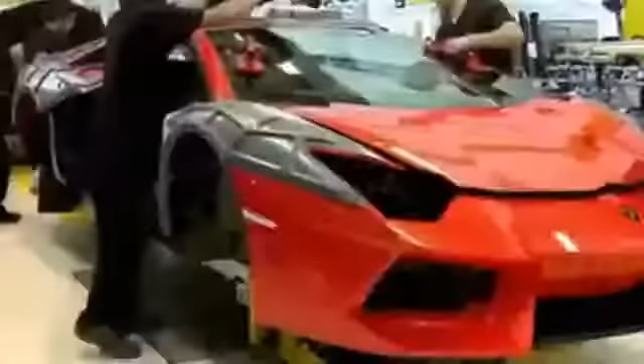But this will be no simple reworking of Lamborghini's old flagship models. Its engineers and designers are given the task of starting with a completely clean slate. At its MegaFactory in northern Italy, the Lamborghini team has been stretched to its limits to fulfill those expectations. Now, as its latest creation takes to the road, it will be seen if the high-risk strategy has paid off.

Lamborghini has been responsible for some of the world's most iconic sports cars of the past half-century: the 350 GT, Miura, Countach, Diablo. The brand has achieved global recognition for its no-holds-barred approach to automotive engineering. Its extreme and powerful machines have placed it among the supercar manufacturing elite for decades.

But there's no room for complacency in this increasingly crowded marketplace. And a decade since the launch of their last flagship model, the Murcielago, it's time for Lamborghini to flex its muscles once again.

It's up to Stefan Winkelmann, the company's CEO, to come up with a bold approach. One of the toughest things was to give the right briefing, and it took us weeks and months. And once I went home and I was thinking about it, so easy - it's just down to two words: no competitors.

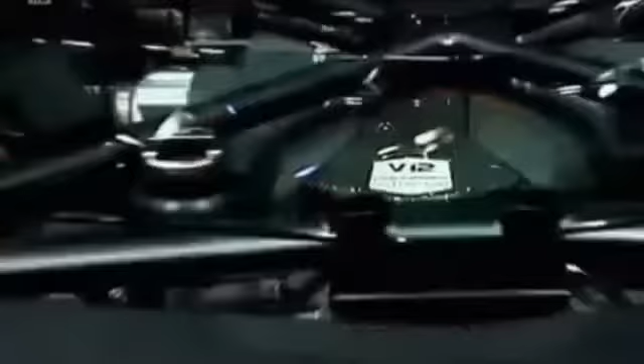For us, the Aventador was something which has to re-establish the leadership, to be a benchmark for a decade. So it has to be a jump of two generations, something really different from what has been there.

Powered by Lamborghini's trademark V12 engine, the Aventador can reach speeds of up to 350 kilometers per hour, and it travels from 0 to 100 in under 3 seconds. It's their fastest car yet.

But remarkably, speed isn't even top of Lamborghini's priorities for the Aventador. Stefan Winkelmann has laid out his vision in a manifesto for the future of the supercar. Now, in our days, it's much more important to speak about the power-to-weight ratio, so the balance between the power of the car and the weight of the car. And for us, in the future, it's much more important to reduce the weight, because you get a better feeling, a better driving experience. The Aventador is the first test of this new blueprint.

The National Geographic channel has been given unique access at the Lamborghini factory to witness the creation of some of the car's first incarnations.

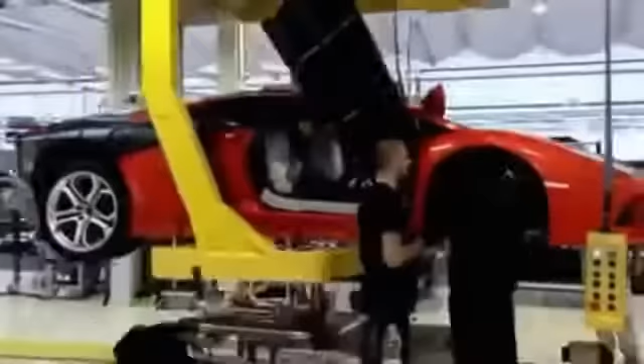This is Sant'Agata Bolognese, a typically picturesque town in the heart of Italy's Emilia-Romagna district. But it is in fact anything but typical, as it's home to Lamborghini, one of the world's most renowned supercar manufacturers.

The factory is situated in the heart of what is known as Motor Valley in northern Italy. Sant'Agata is intrinsically linked to Lamborghini's success, according to its head of communications, Raffaello Porro. Everybody in the world recognizes our cars come from Sant'Agata Bolognese. And so our factory is a kind of temple where people come - they can call it a pilgrimage - to visit where those cars come from.

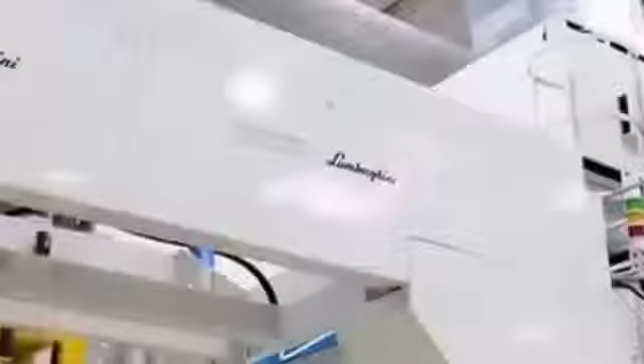The factory has seen many changes over the years, but its purpose has never wavered: to produce vehicles that challenge the status quo. And a largely local workforce is a vital part of that ethos.

They're coming from this region, not even from the region, they're coming from this part of Emilia. You know, we are in Emilia-Romagna, it's the Motor Valley, and this is in Emilia. So a lot of our people are not only living here, they were born here, they are here since generations, and a lot of workers we have in our factory, in our plant, are here at the second generation.

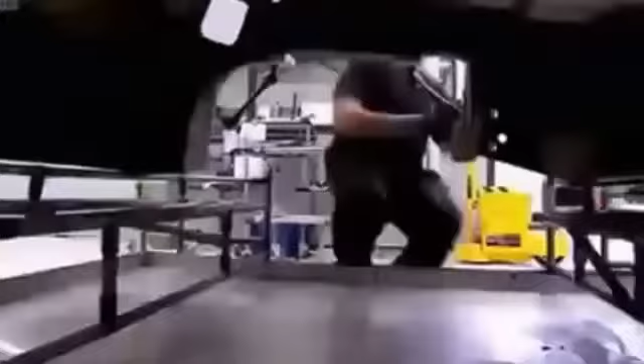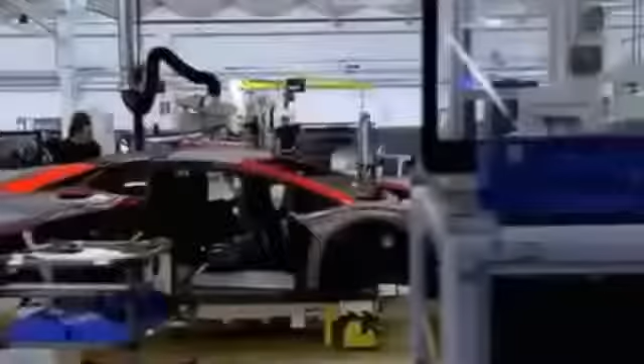These people are Lamborghini's lifeblood - over 400 individuals working with a singular aim: to produce high-end vehicles that consistently capture the public's imagination.

In the last couple of decades, a new breed of creative and high-tech vehicle specialists has emerged. Companies such as Pagani and Koenigsegg have set their sights on toppling the most revered names in supercar engineering - names like Lamborghini.

But it's unlikely that this Italian giant will let its mantle fall without putting up a fight. An attitude embodied in the company's emblem, the Raging Bull, partly inspired by the bravery of Spain's legendary fighting bulls, one of which showed such fearlessness in battle that it...

...was awarded a trophy for its courage in 1993. Its name was Aventador, and almost 20 years later, its legacy lives on in Lamborghini's latest model. It's Aventador's battling spirit that Lamborghini's development team must channel.

In 2007, they're faced with the daunting task of creating a supercar that sets the standard for all others. Maurizio Reggiani, head of research and development, realizes that the only way of doing so is to take a step into the unknown.

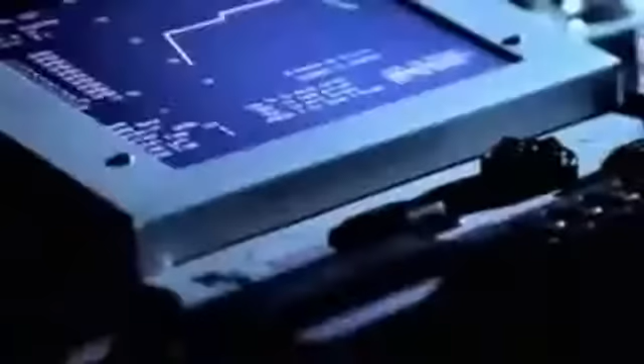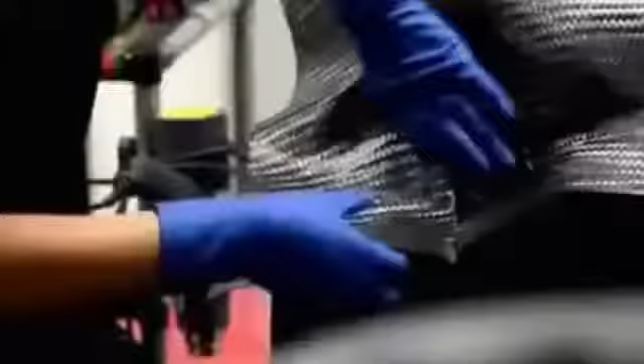A full carbon fiber monocoque. These structures are common in racing cars, but the high cost of materials and laborious production methods have made them unavailable to supercar manufacturers, who've had to combine carbon fiber with cheaper, heavier elements, such as aluminium. That is, until now.

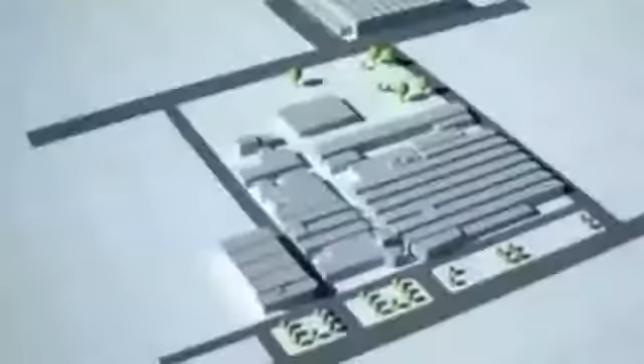The development team has devised a method that allows this race car technology to be mass-produced. But it requires a specialist facility that's up to the task. So in 2009, they built a whole new MegaFactory just down the road from the company headquarters, devoted to constructing the Aventador's unique carbon fiber body.

Which, being just 147.5 kilograms, helps make the Aventador significantly lighter than the Murcielago, considerably improving the all-important power-to-weight ratio, and in turn, the handling.

Lamborghini hopes that this innovation will stave off the threat by the new wave of rival companies. Lamborghini knows well what it's like to be the cocky young upstart, vying to unsettle the established names, as that's how it began almost 50 years ago.

The man upsetting the status quo back then was the company's founder, Ferruccio Lamborghini. He had made a fortune from a tractor manufacturing business and used some of his money to satisfy his love of sports cars.

According to Lamborghini legend, when he went to Ferrari to critique some of their parts, his views were dismissed. He got a negative response out of some requests he had and proposals to make a better car. And so he said, I will found my own company and I will create the best super sports cars ever.

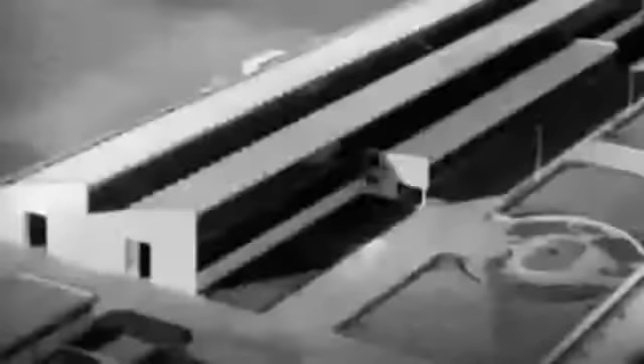He established Automobili Lamborghini in 1963, and for the next few years he toiled furiously to achieve his goal. The cars he created were well received, but it wasn't until the launch of the iconic Miura in 1966 that Lamborghini really made its mark.

The tractor maker had succeeded in breaking into the exclusive world of supercars with his bold new enterprise. Almost 50 years later, despite having joined the ranks of well-established sports car manufacturers, the company still strives to be edgy and uncompromising.

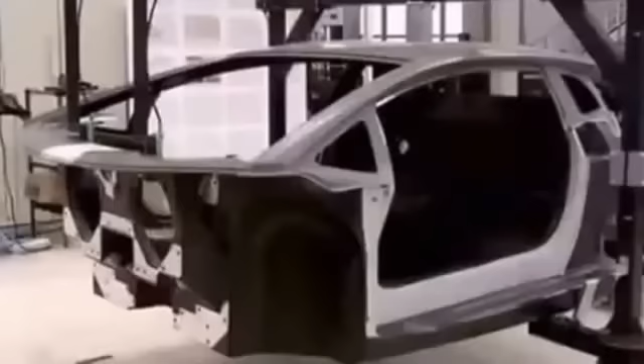As demonstrated by its approach to the area it believes will define the future of sports car engineering: lightweight carbon fiber construction. The company's relationship with carbon fiber goes back as early as the 1980s, when it created the Countach Evoluzione, a concept car which experimented with the use of composite materials.

It was dreamt up by the newly formed Composites Department, whose successor has made many inroads into research and development of lightweight composite materials. And discoveries made here mean that next door, the company has been able to construct its new carbon fiber production facility.

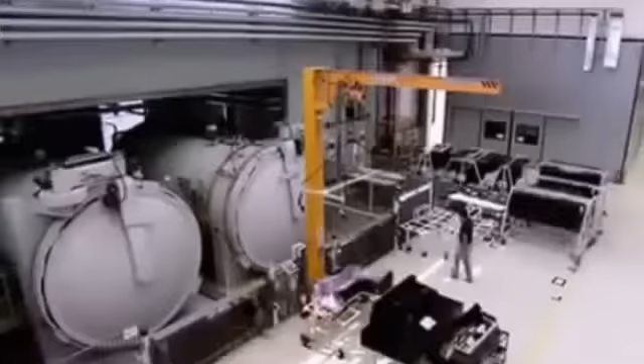The man given this task in 2009 is Ranieri Niccoli, Industrial Director, and he must devise it completely from scratch. So, when we design and we build this factory, we didn't have any automotive benchmark. We were the only one in the automotive business to build and to run this kind of technology.

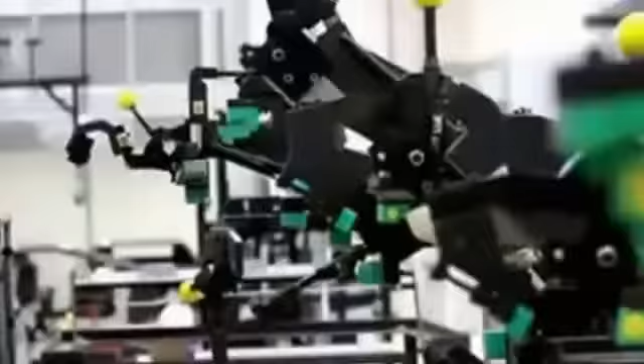So they have to look elsewhere for inspiration. So we look to other sectors, for example, the aeronautic sector. Then we adapt and we modify their process to a Lamborghini production system in order to build our car.

The result is 500 square meters of new production space, known as the CFK, devoted entirely to sculpting the Aventador's super lightweight monocoque.

Here, 146 carbon fiber specialists toil day and night to create 4 complete monocoques every 24 hours. To achieve this target, engineers have developed a unique production system. All materials are first cut by an automated machine before being sent for preparation.

The material is placed into molds and laminated in a vacuum bagging process which forces the layers into shape, before being cured in a large pressurized oven known as an autoclave.

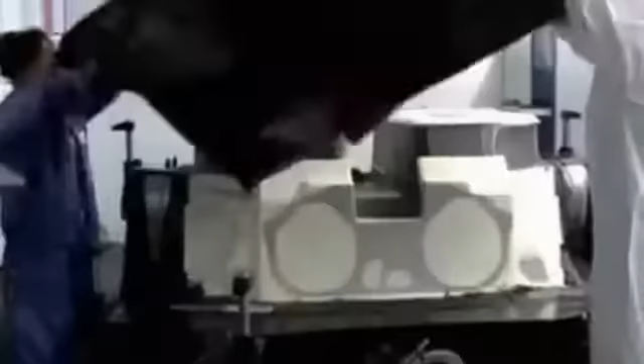Meanwhile, the production of other parts of the monocoque is underway, as operators fine-tune and cut more layers of carbon fiber with the assistance of precision lasers.

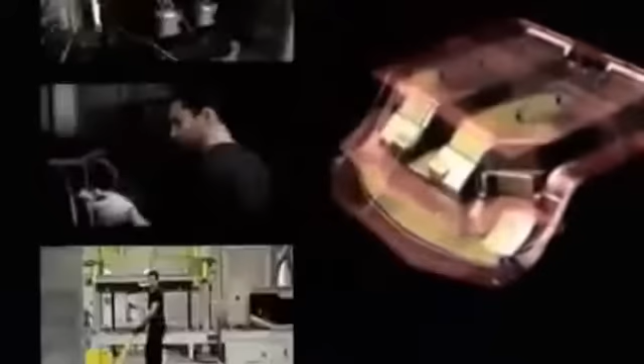A special oven is used to inject resin into the carbon fiber mats, which transforms them from soft sheets of cloth-like material to a strong, rigid structure.

After all these processes are over, the two key sections are finally recognizable: the base section, known as the tub, and the roof.

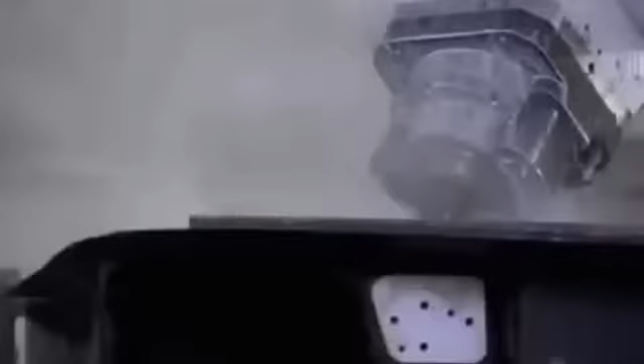They're placed in an automated machine, which drills them with holes allowing for attachments to be made later.

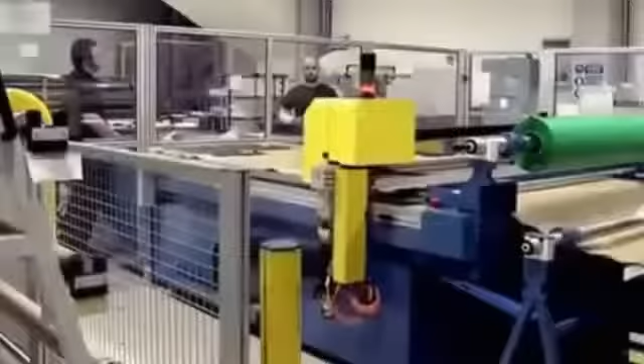Throughout the factory, computer-controlled machines share tasks with human specialists, a partnership that's integral to the Lamborghini production process. The main priority of our plant was to follow the Lamborghini production system, with a high degree of craftsmanship, high degree of skill, people, combined with a technology, with automatization process. This was the main challenge that you can also see in our plant.

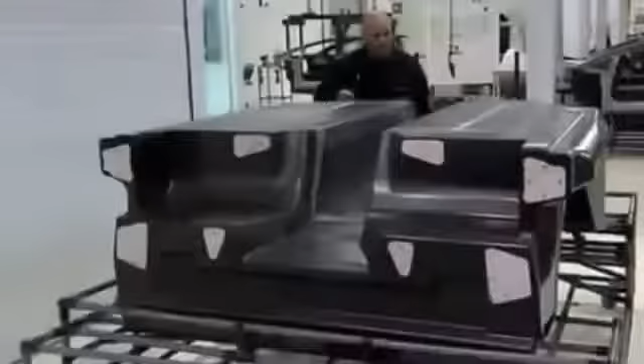Aeronautic-inspired engineering is ingrained in many aspects of the Lamborghini CFK production process, such as this stage, known as the Harmony Hammer Test. In this quality control test, an operator strikes the monocoque section with a specially designed hammer and allows it to vibrate, listening out for areas where air might be trapped in the carbon fiber shell.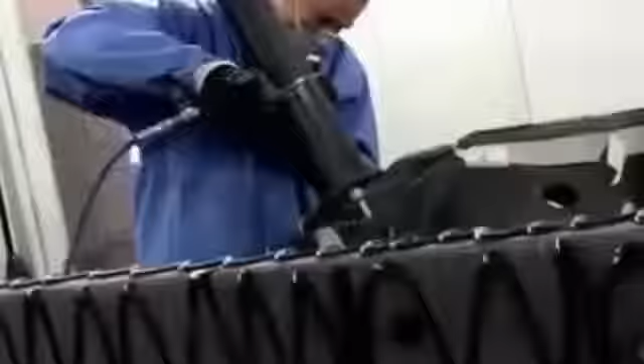Once checked, the parts are ready for their union, as the tub and roof are glued together, turning the monocoque into a single entity.

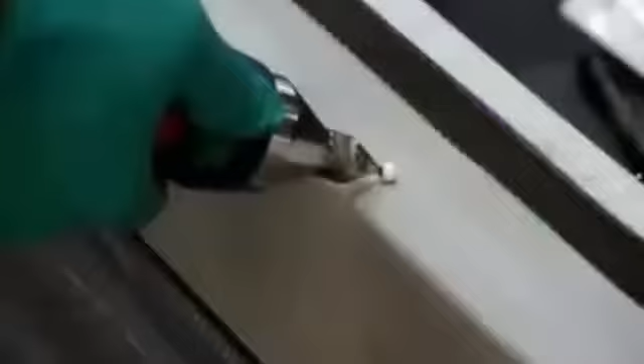It's essential that the two parts of the monocoque are exactly aligned, so workers use a robotic arm with a 3D laser attachment to check that the sections have been coupled correctly. Once the correct dimensions are confirmed, metal sections are manually attached to the monocoque and the body is complete.

Then it's into a light tunnel where surfaces are quality checked to ensure they're in pristine condition before the Aventador's body is signed off for release.

As the body is ready to leave the carbon fiber plant, it's possible for the first time to see the Aventador's unique geometry taking shape. This extreme design is one of the most recognizable aspects of the Lamborghini DNA, and it's a tradition maintained and pushed forward here, at Lamborghini's design center, or Centro Stile.

The generational leap required of the Aventador does not stop with its engineering capabilities. The look of the car is integral to its ambition.

The design of Lamborghini always has to be revolutionary. Yes, you have to understand, if you see a car in front of you, this can only be a Lamborghini even if you don't know the model. So it's very tough for our designers because they have to create something new, but recognizable at the same time.

The job of the design team and its chief, Filippo Perini, is made even tougher during the earliest phase of the Aventador's development, when the board forces them to compete with outside companies to earn the right to design the new model. And at one point, victory comes close to slipping through their fingers.

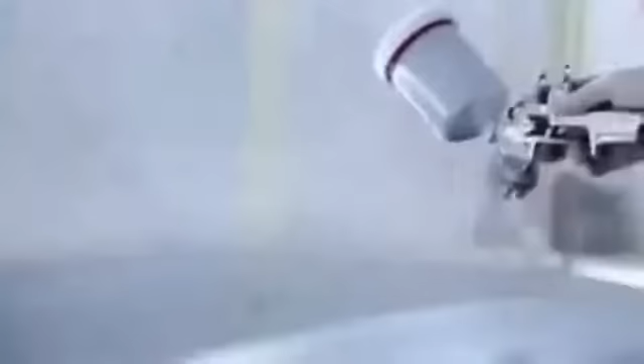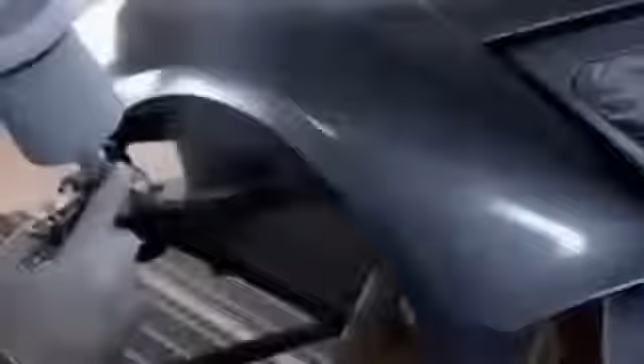After the CFK, it's taken away to be given one of its most important characteristics: its color. Here at the paint shop, it's lavished with the kind of attention that most cars could only dream of. One of 13 colors are hand-sprayed over every part of the bodywork.

27 pieces are given individual attention by a specialist who covers them with 8 liters of paint. The Aventador, with its extreme lines, requires more man-hours than any other Lamborghini in the past.

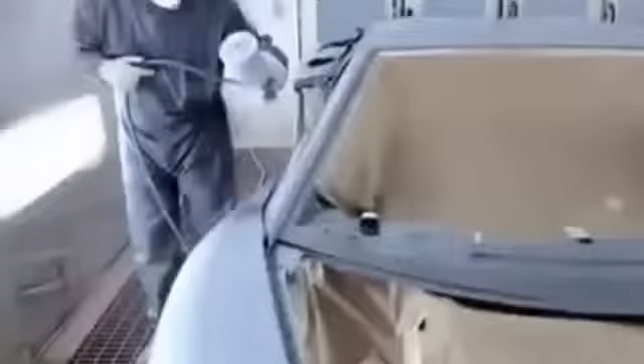And of course, every phase is carried out manually, as only human analysis and dexterity can ensure that each surface is covered with exactly the right amount of paint.

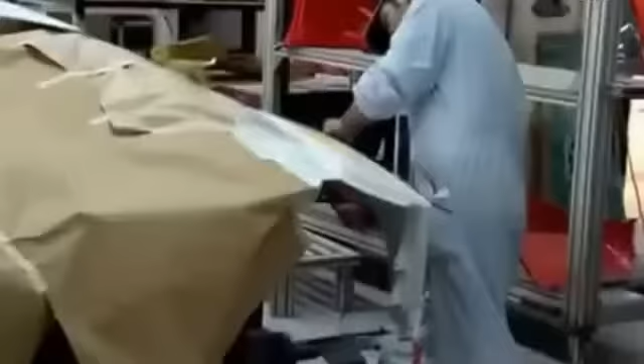In total, 200 man-hours are spent on every single Aventador while at the paint shop. 3 whole days are spent on polishing alone. After being carefully sanded, the Aventador is repeatedly buffed with special materials.

After that, it's sent for another quality check in a light tunnel. For 2 hours, an inspector walks around the bodywork, checking for color perfection. If there's any inconsistency, the offending section will be sent back to be repainted.

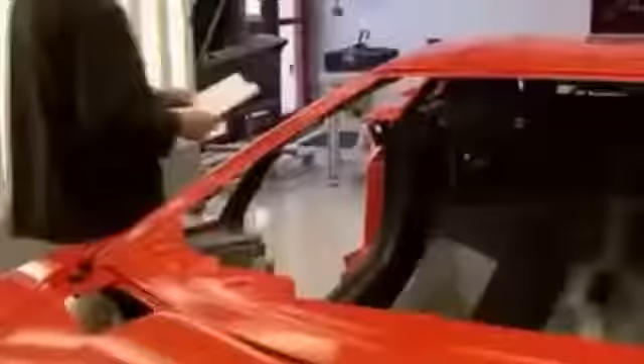Under-polished areas are also marked out for extra attention. These hundreds of hours of devotion end when the exacting standards of the inspector are met, and the car is released for the next phase of production, the assembly line.

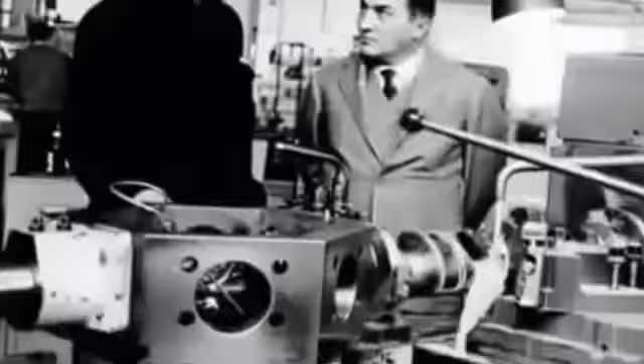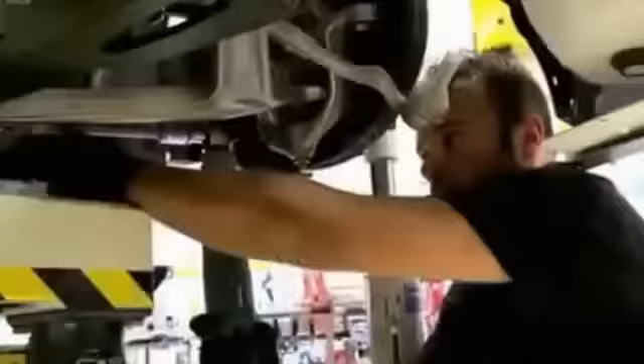The assembly line for the Aventador lies just meters from the original site of the Lamborghini factory, built almost half a century ago. Back then, its founder, Ferruccio Lamborghini, was known for his hands-on approach, frequently seen on the factory floor, directing operations. He focused on the skill of the mechanic as being key to the success of the product, and that attitude still permeates the site today.

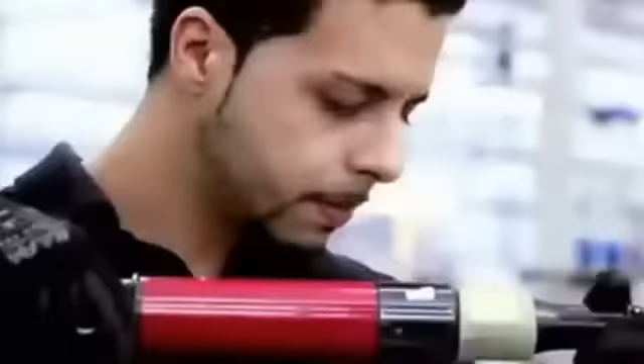Here, 50 workers spread over 11 workstations are responsible for the task of assembling Lamborghini's latest model. The man in charge of making sure things run smoothly is production manager Andrea Costantini. He sees his highly trained workforce as a direct link with the roots of the company.

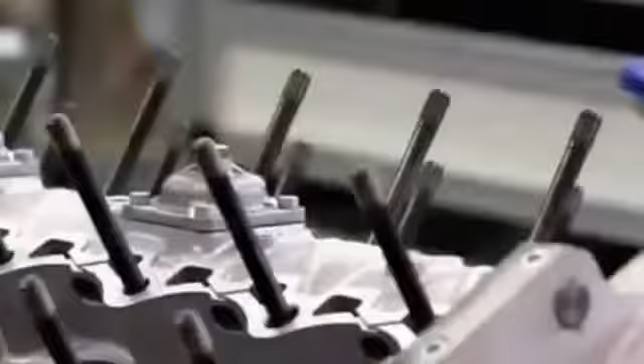In this case, the workers are the most trained. We take these guys directly from the best schools of mechanics in Emilia-Romagna, here in the surroundings of Lamborghini, and we train them for more than 2 years to allow them to be really the best experts on mechanics and engines. So everything is done manually, still like we did since 1963, since when Mr. Ferruccio Lamborghini, the owner of Lamborghini, started.

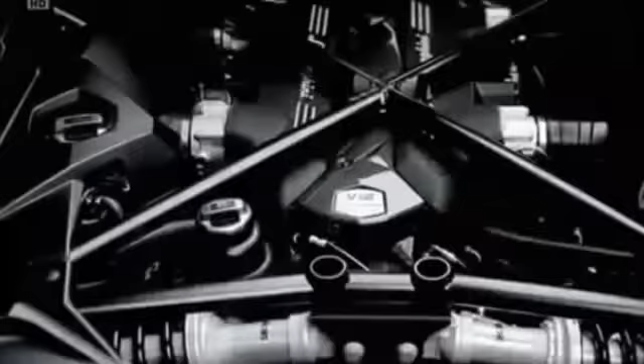In an age when machines dominate production in almost every field of manufacturing, loyalty to the art of skilled manual labor is not often seen. But here it's believed that when it comes to reliability and precision, humans still have the edge over machines. And nowhere more so than in the engine assembly station, for this is where the heart of the Aventador is put together, the Lamborghini V12.

At a time when many sports car manufacturers are shying away from using the 12-cylinder engine, Lamborghini is resolute. The V12 always has and always will provide the power for their flagship models. The V12 for Lamborghini is part of our DNA. Everything for us is rooted in our history, which started with the 12-cylinder engine.

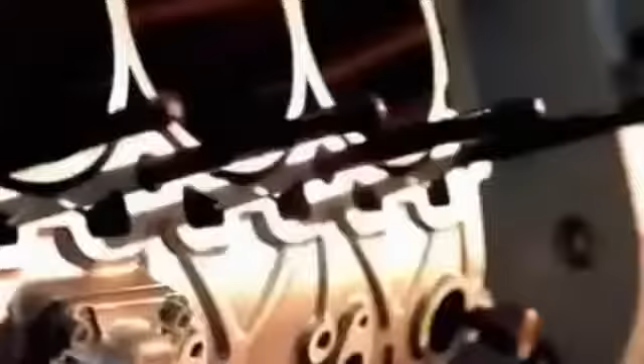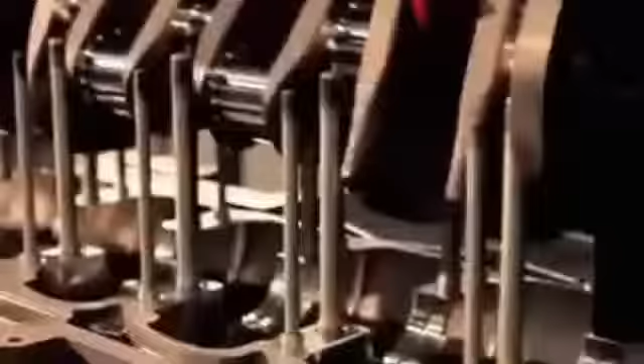With 6.5 litres of displacement and 700 horsepower, the Aventador's V12 is about as gutsy as it gets. But as with everything else, it's had to move with the times. Lightweight, again, is the order of the day. And despite the fact that this engine is more powerful than the Murcielago's, it weighs less, just 235 kilograms, by using aluminium silicon alloy on components such as the crankcase.

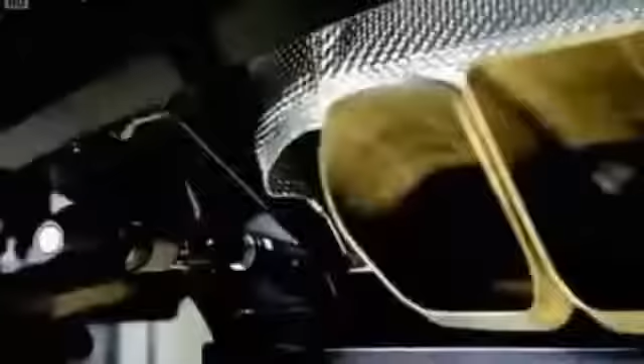The main purpose of the V12 is to power the Aventador, but when linked with the car's exhaust system, it takes on another significant role, creator of the mighty Lamborghini Orchestra. The V12 motor represents what for us is the sound, the music of the car, the way in which it's presented to the public, the way she makes herself heard and announces her arrival.

To achieve this, we invest a great deal of time in simulations. We simulate the sounds that we can have, and then we experiment first in the lab and then on the vehicle itself. This 12-cylinder symphony has a full range, from a moderate rumble through the town at low revs to the screaming crescendo of maxed-out gear shifts.

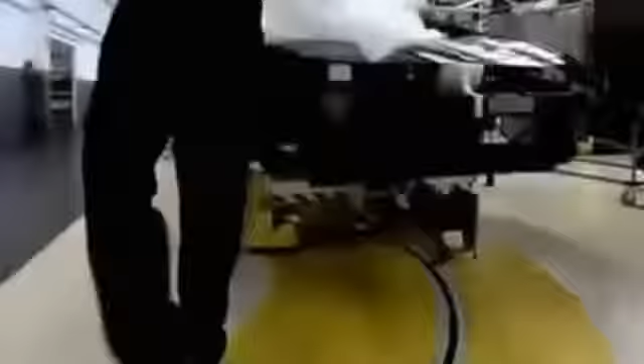While the V12 is being assembled, the body of the Aventador arrives on the assembly line, ready for conversion from an empty shell into a fully functioning supercar. As the company's latest foray in a highly competitive market, the Aventador needs a production process with efficiency to match.

The drive for improved efficiency was for sure coming from the market, from our competitors. We have always to be the best, to be number one in terms of product, in terms of performance, but also in terms of quality. So to become and stay number one, we have always to have a huge increase of efficiency, a huge increase of quality in the assembly line and in all the processes inside the factory.

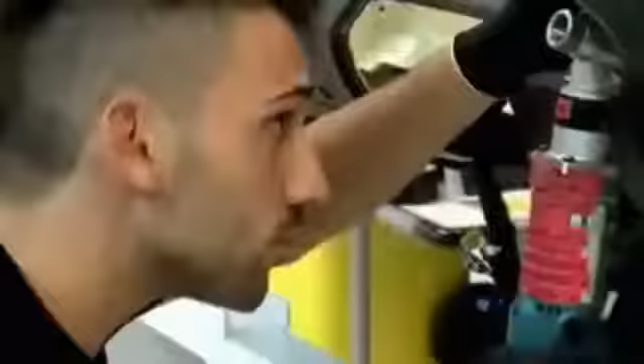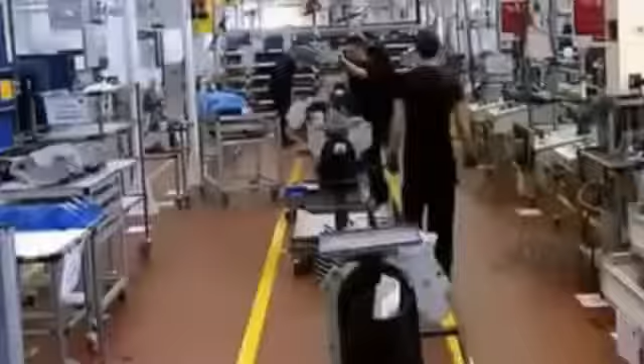The company's output of luxury vehicles is a mere fraction of what large-scale manufacturers produce for the mass market, with around 800 Aventadors due to be created in the first year. But that doesn't mean the factory can't be run to similarly exacting standards of efficiency as the largest groups. Workers have just 1 hour and 40 minutes to carry out a whole range of highly meticulous tasks. If they take too long, the whole assembly line will stall, targets will be missed, and costs will mount up.

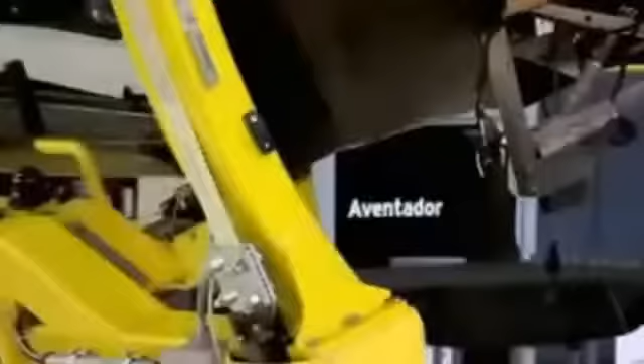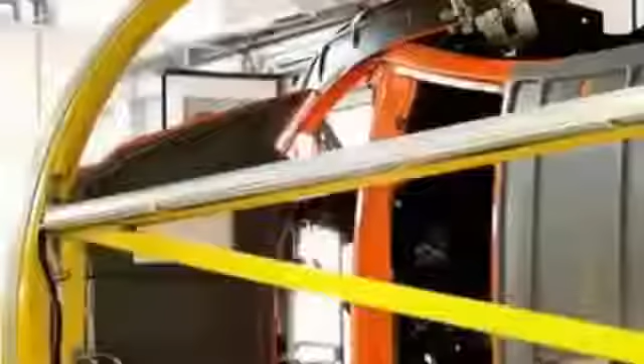The countdown starts here, at the first station. Work is carried out on the underbody and front differential by lifting and rotating the vehicle to give the mechanics easy access, before being readied for what is arguably the most significant stage in the Aventador's production: the insertion of the colossal V12 powertrain into the car's chassis.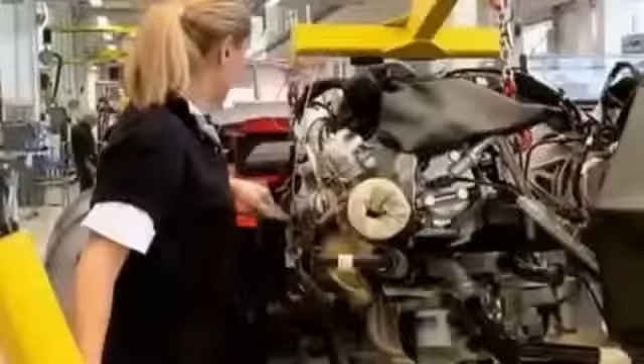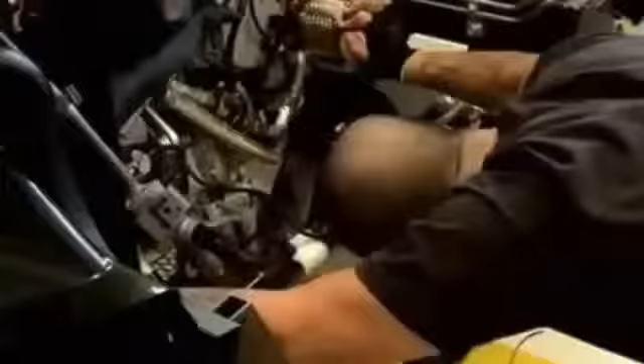Here we are in the most critical assembly station of the Aventador assembly line. Here we have the assembly of the engine, the heart of the car, basically inside the body. We call it the marriage between the car and engine. This marriage of elements is when the development team's work of the past 4 years comes together, where design and engineering combine.

Here, as with all other phases of production, the specialists of each station take full responsibility for their section. You can see the workers check each and every single connection to be sure that each and every phase was done in a good way. The risk in this case is the car is not working properly afterward during the road test, and could be a big problem for a customer using it.

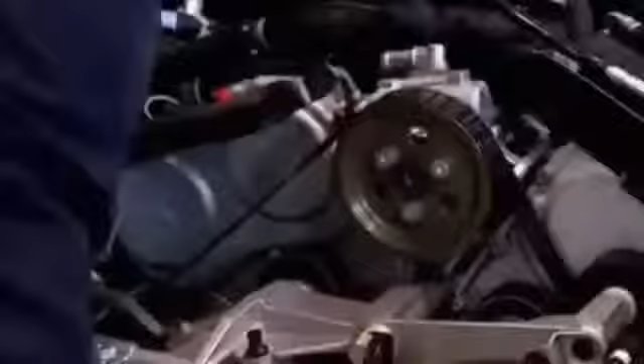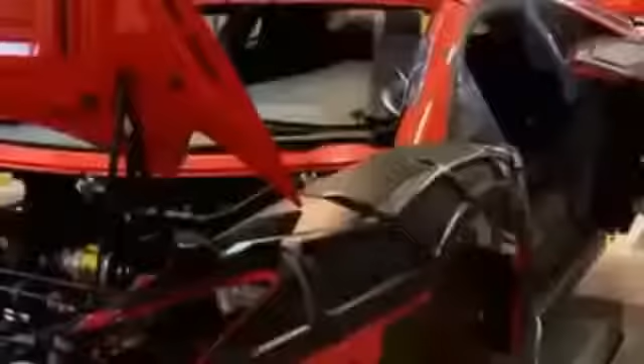As you can see, this is absolutely not done with equipment, a robot, or other automatics, but is done manually. Step by step, the car is taking shape, being molded from an empty shell into the fully formed supercar that will leave the factory.

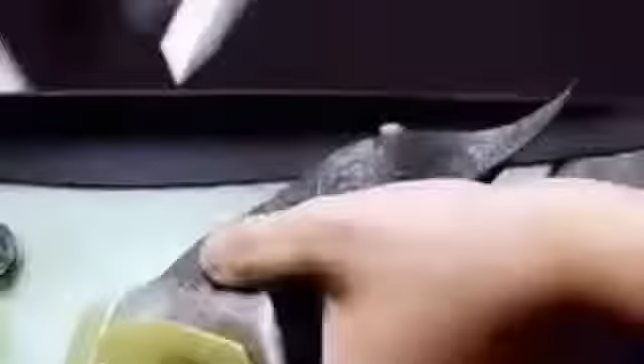And while the assembly line is in full flow, next door, the second critical aspect of the Aventador is being prepared: the interior. It's in this sector of the factory that a customer's individual preferences for the way their car looks can really be indulged.

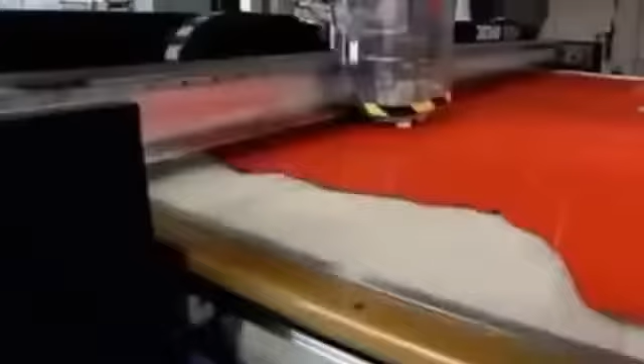About 100 square meters of leather hide in 9 different colors arrives each day. Attention to detail is essential to pass the stringent quality control checks. Here, a leather specialist looks for minor imperfections in the hides and marks them up wherever found. An automated machine recognizes the marks and cuts around imperfections, leaving only pristine material for the Aventador's interior.

The leather is then taken to specialists with 3 years training to be stitched and glued onto the various parts that make up the Aventador's interior.

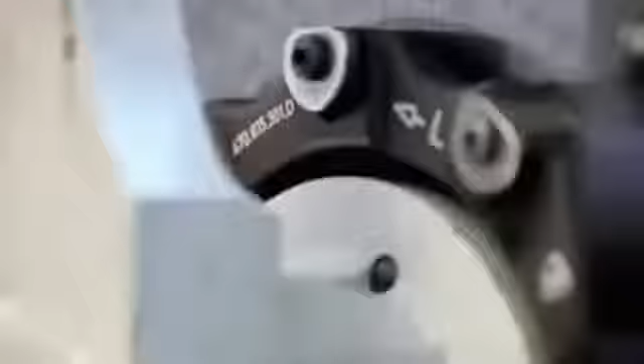Back on the assembly line, one of the Aventador's most important pieces of kit is ready. This simple-looking item is the suspension, but its apparent simplicity belies the creativity that goes into its engineering. The Aventador uses a pushrod suspension system direct from the world of Formula One race cars. It works by keeping wheel control and damper elements separate. By keeping the damper elements inboard, the pushrod system allows the wheels to maintain maximum contact with the road when going round bends, massively improving the handling on corners - a must for a car that can hit speeds of up to 350 kilometers per hour.

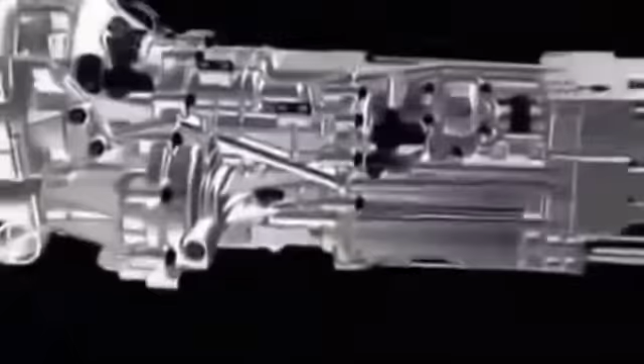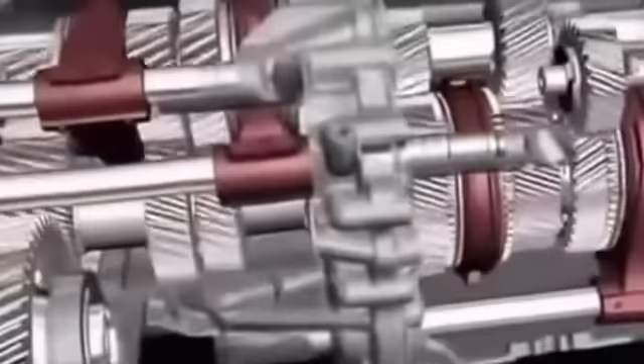But it's what's happening away from the eye that's most remarkable: the Lamborghini patented independent shifting rod transmission. This technology allows the shifting process to run virtually in parallel. While one shifting rod is disengaging one gear, the second shifting rod can already engage the next gear, creating a shifting time of just 50 milliseconds - not far off from Formula One transmission times, which average around 30 milliseconds.

Such technological innovations are only made possible by extensive testing of the vehicle during the development phase. Possibly the most critical moment for the engineers is when the prototype model takes to the track to be put through its paces for the first time. For the Aventador, this happens back in 2008.

Then we found ourselves at the first track run of the Aventador, which generated an indescribable emotion. At night, on the Nardo track, a small group of people seeing a creature move for the first time that had needed years and months, nearly a year and a half, before it was able to move. And the perception, after these first laps, based on what our test drivers told us, was that we'd created something that really was the new landmark for super sports vehicles.

The man behind the wheel of that prototype Aventador was Lamborghini's chief test driver, Giorgio Sanna. He's been a key member of the Lamborghini development team since 2001. A dream job for many, but the thrill of driving prototype supercars comes with certain pressures.

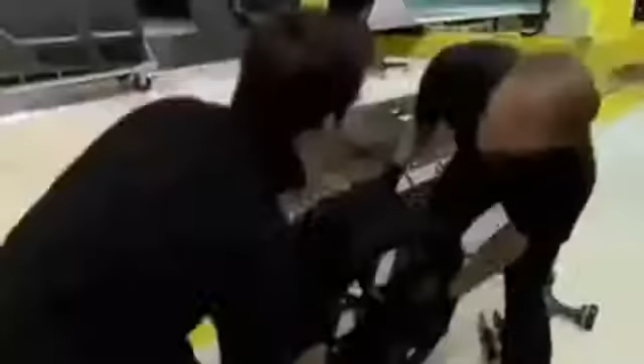The Aventador is reaching the final stages of the assembly line, and mechanics work quickly to get it ready for the next phase of production. Here we are in the last workstation of the Aventador assembly line. After 4 days of assembly, over 50 workers in the line and more than 60 in the saddlery and the engine have assembled our cars.

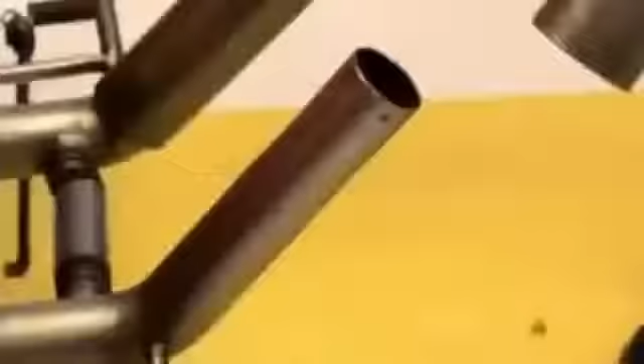As important as the assembly process itself is the series of quality control checks that the car must undergo once it's complete. Any minor imperfection could impact on the car's performance, and its safety elements in particular must be rigorously tested.

The brakes are checked in a room where the car is driven at speeds of up to 140 kilometers an hour on a rolling road. The Aventador's carbon ceramic brakes can take it from 100 kilometers per hour to a complete standstill within 30 meters.

And in theory, the Aventador is capable of going from 0 to 100 and back to 0 in less than 4 seconds. Data from the anti-lock brake system is transmitted wirelessly to 2 dishes, then into a computer mainframe for analysis.

The final task of the factory workers is to scrutinize the car in a light tunnel to ensure that aesthetic standards haven't been affected during the assembly process.

But before it can be shipped to whichever global location it's destined for, each Aventador must undergo one final phase: the all-important road test.

Every car is given its own test drive around the local area. They're put through their paces to check that their complex engineering is absolutely in tune. And it's here for the first time that the cars are enjoyed as they were intended to be.

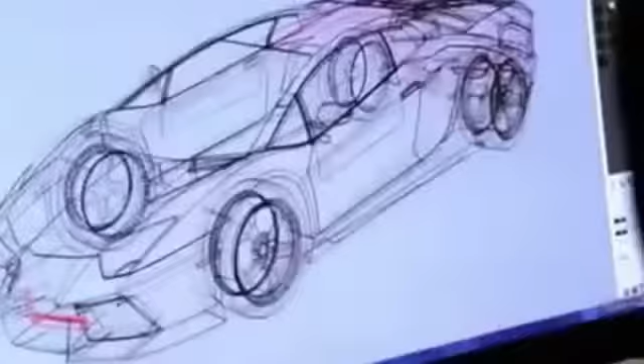The Aventador has come a long way since the brief was first given for its creation in 2007. Years of struggle from designers, engineers and mechanics have culminated in a vehicle which looks likely to remain as Lamborghini's flagship model for some time to come.

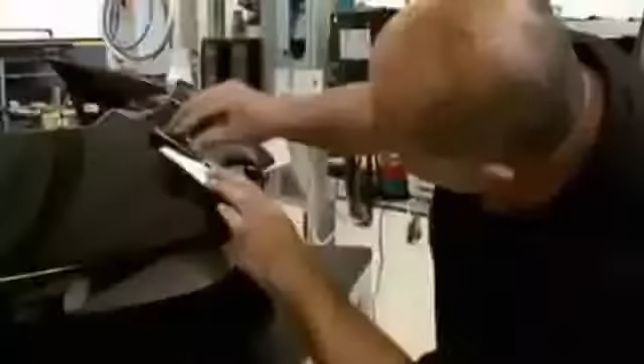The risk of starting completely from scratch has paid off. And with the new era underway, complete examples of the Aventador are rolling off the assembly line at a rate of 20 each week.

But for Lamborghini, the challenge does not end here. As the company celebrates its 50th anniversary in 2013, it will be thinking of new ways in which it can push the boundaries of automotive engineering.

Stephan Winkelmann suggests that a different era might be around the corner.

Our two-model strategy for the future will not be enough, so we decided to step into a third model. It will be a Lamborghini which you can be able to drive every day, so a very usable Lamborghini, but it will always have the DNA of the true Lamborghinis inside.

A Lamborghini for everyday use may be on its way. But until then, the Italian supercar manufacturer will focus all its efforts on producing vehicles which aim to keep them ahead of the competition. And right now, the car leading that charge is the Aventador.